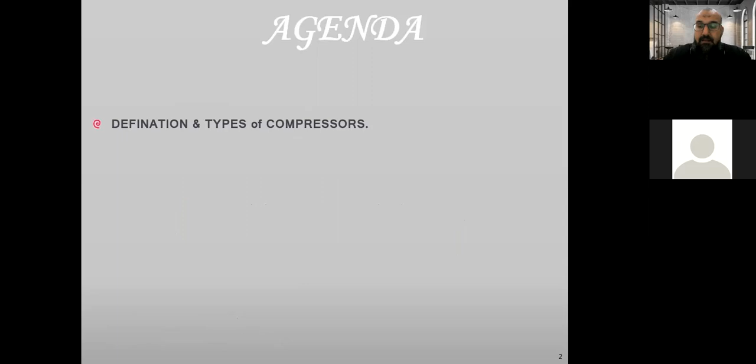After we finish this, we'll second speak about the minimum or general notes about reciprocating compressor, so we will go specifically about one type to describe and explain. We have two major types of compressor. Today, one major type is the reciprocating compressor, which will be our session today.

We'll speak about the arrangement of the reciprocating compressor, how we arrange it, how we locate it, what is the equipment related to the reciprocating compressor, how we put this equipment, what is before, what is after. Then we will study also the piping surrounding the reciprocating compressor.

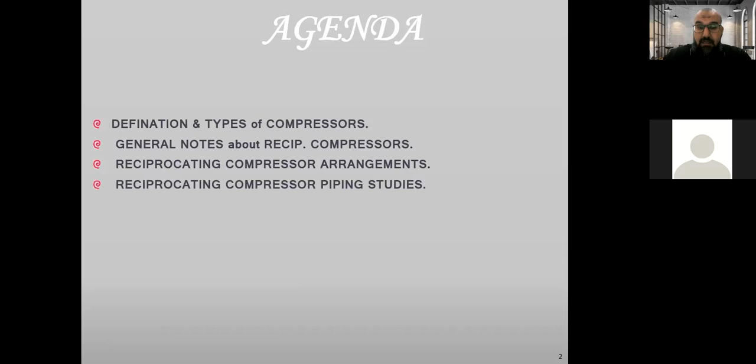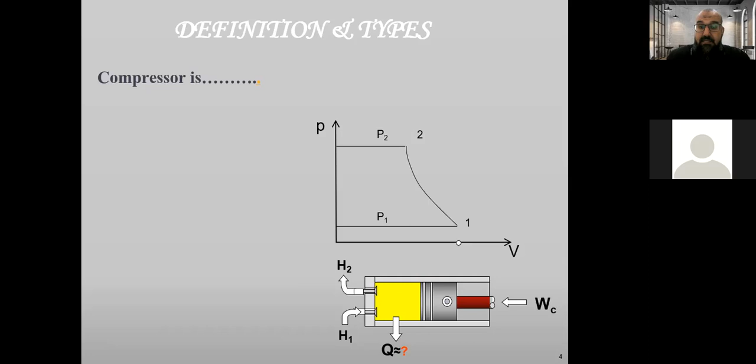So let's start with the compressor itself. What is compressor? What is meant by compressor? It is from the meaning compress - to compress the gas or vapor or air. Any kind of gas or vapor or air - this is a machine that is required to increase the pressure of the gas or vapor or air by compressing.

How are we compressing the gas or air or nitrogen, for instance? By reducing its volume. If someone of you understands mechanical engineering, he will understand what I mean. This is a relationship between the volume and the pressure. P is for pressure, V is for volume. Volume, this is a volume, right? Like the room that I am now staying in is a volume.

This is a room that I am inside, so I am inside the volume. This is the volume - for example, this cup of tea or instant, this is volume, contains a volume of liquid. So this is the volume.

What is the pressure? Pressure is the force on area, or the force relative to area, which I need to transfer flow from point A to point B, or point 1 to point 2. So the pressure is the required force to transfer the flow from point 1 to point 2. So what is the gain here?

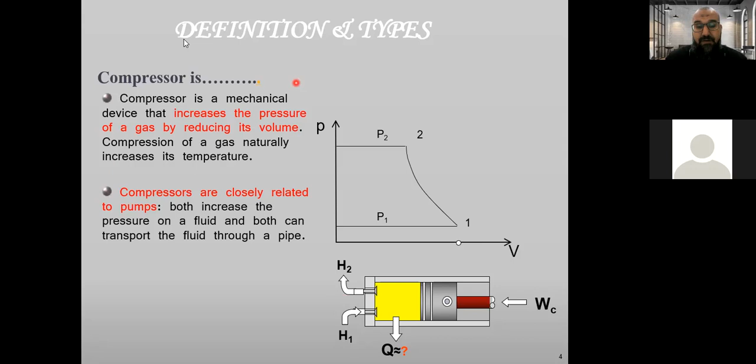So, as I told you, the gases are compressible. What's meant by compressible? Gases are compressible means that it can be compressed. If you have a volume of air, like this room that I am staying in now, and you have a liquefied petroleum bottle, gases compressed in a bottle, and you open it.

You open it, right? These gases will quickly go everywhere, all the way. They will actually occupy all the space, all the volume. The new volume will be occupied by the gases which were compressed. It will occupy a new volume to accommodate all this room. Vice versa, if I need to suck all the gases and liquid from the room, I can compress all of them in a bottle or in a cylinder, for example. This can be compressed.

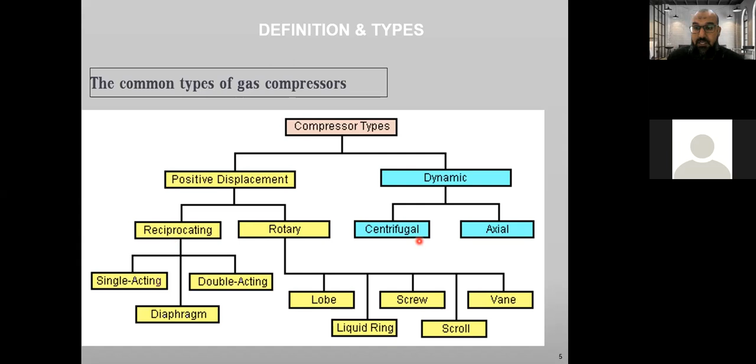Or petroleum industry. You can use reciprocating, which is common in the oil and gas or petroleum industry. You can also use centrifugal type, which is also common use. So this is the dynamic type, and this is the positive displacement type.

Let's focus now on the positive displacement type, which is the reciprocating compressor. The reciprocating compressor is the same machine that is used in the internal combustion engine, close to that one. The internal combustion engine in your vehicle, in your car,

they are using reciprocating type, piston and cylinder. Like if you know this car is 6-cylinder, 4-cylinder, 3-cylinder, 12-cylinder, you know the type of car is based on the number of cylinders. What's this cylinder? This is the cylinder of the reciprocating type, which acts with the piston to do the reciprocating cycle to compress the flow.

So that's why we use this terminology in cars, this car is 6-cylinder or 4-cylinder. It means how much volume we have. That's why its unit is cc. You're saying this car is 1,600 cc. What does cc mean? Cc is cubic centimeter, so that means volume. We are measuring the volume by cube, volume, because it has 3 dimensions, X, Y, and Z. The volume always has 3 dimensions, that's why we say cc, which means centimeter cube.

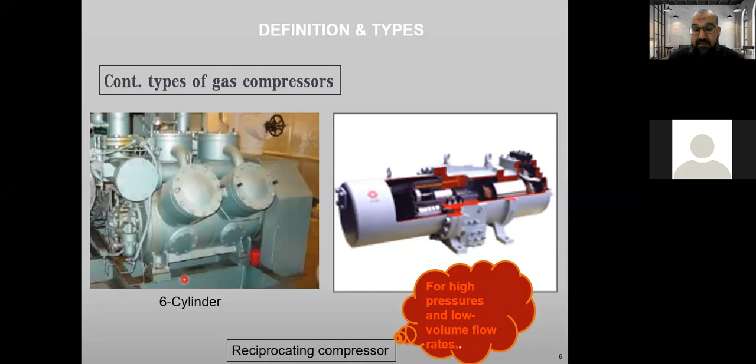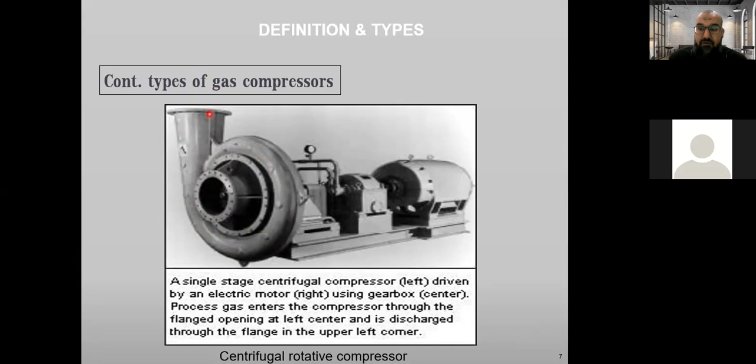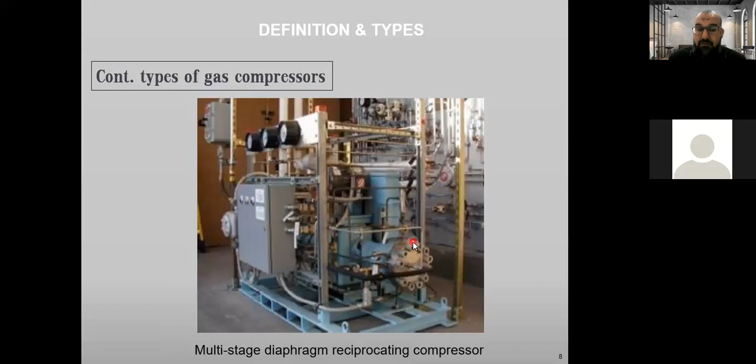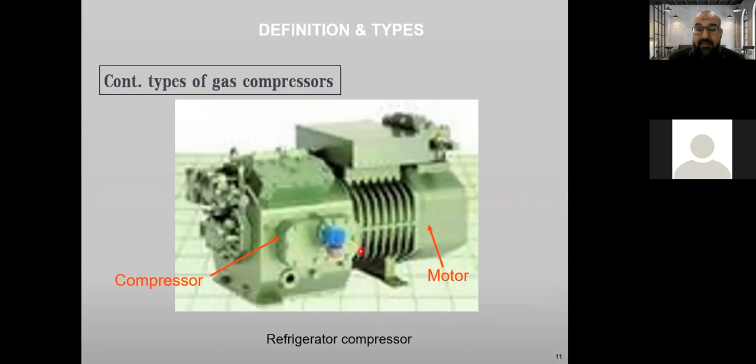Okay. This is one type of air compressor. This is another type of refrigerator compressor. It should definitely be driven either by motor or steam. Here it's driven by motor, electrically, and this is a compressor here.

This is another type of refrigerator compressor. This is the compressor side. This is suction and discharge. You have two nozzles here for suction and discharge, and this is the driver here. The driver is motor.

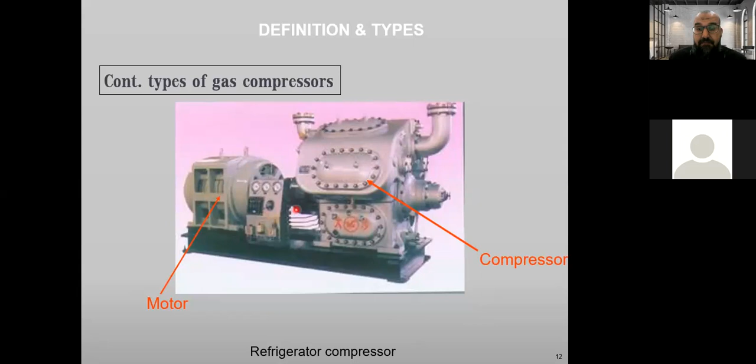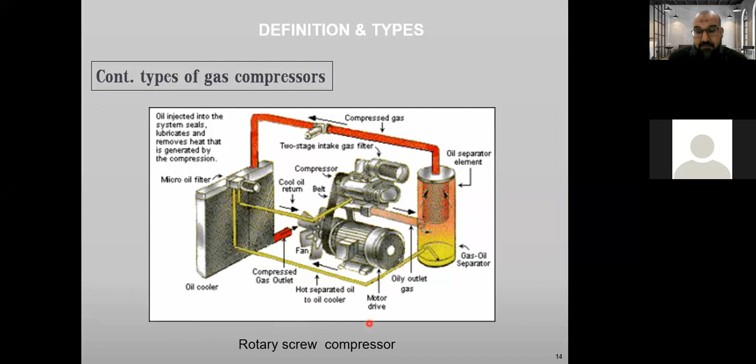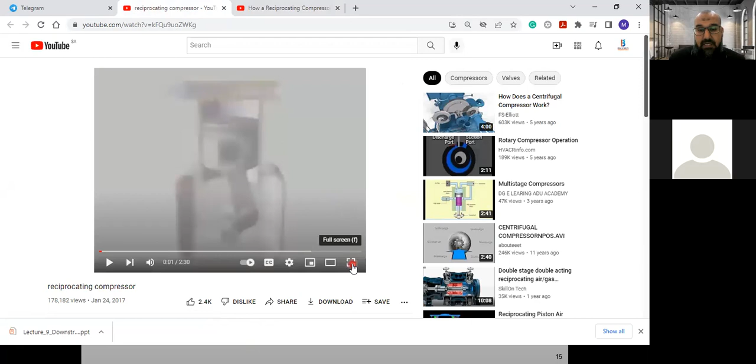So before we go further on the compressor, let's see one video that gives you an example or a meaning of reciprocating compressor and how it actually works in the machine.

A reciprocating compressor compresses refrigerant vapor in a cylinder using a piston. In a way, reciprocating compressors are like automobile engines. The pistons are directly driven through a wrist pin and connecting rod from a crankshaft. Depending on their size, reciprocating compressors may have one or more cylinders.

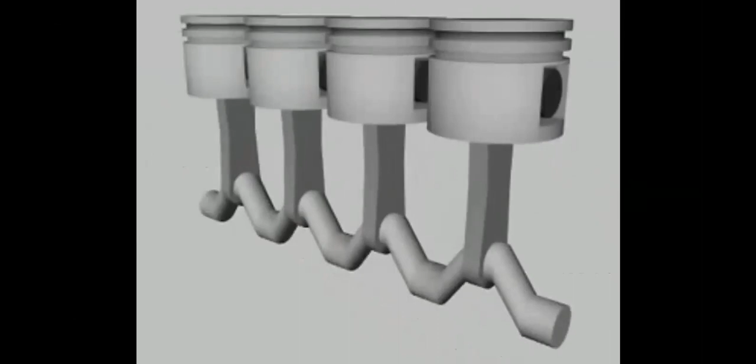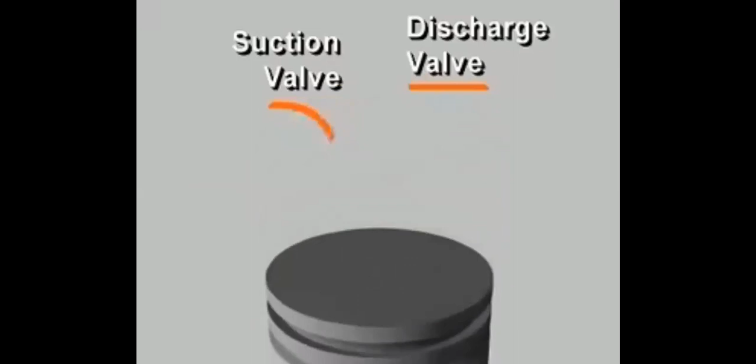Multiple cylinders may be arranged in line, opposed, or in a V. In each cylinder, reciprocating compressors have both a suction valve and a discharge valve. These valves give the compressor its ability to pump refrigerant vapor against a pressure difference. They are usually located in the head of the cylinder, in passages connected to the high or low pressure side of the system. Let's follow the compression process in a single-cylinder reciprocating compressor during one complete revolution of the crankshaft.

Starting with the piston at the top of its stroke, or top dead center, the piston begins to move downward as the crankshaft rotates. Because both valves are closed, the downward moving piston reduces the pressure in the cylinder. As the pressure in the cylinder falls below the low side pressure in the suction line, the pressure difference opens the suction valve, letting refrigerant vapor flow into the cylinder. The piston continues down and pulls in more vapor until the cylinder is filled with low-pressure vapor at the bottom of its stroke.

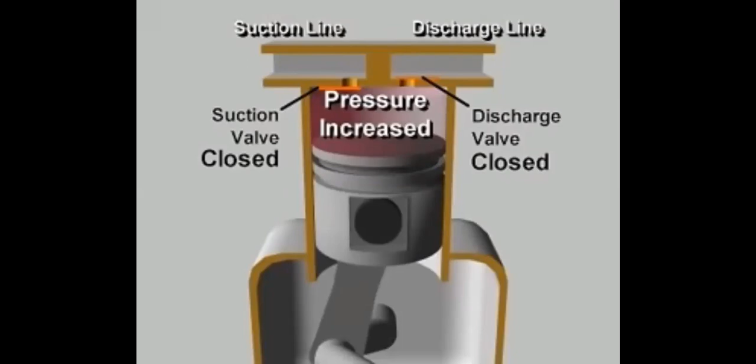Once past bottom dead center, the piston begins its upward stroke. The suction valve closes. As the piston moves up, it reduces the volume of the space in the cylinder, increasing the pressure of the vapor. When the pressure in the cylinder exceeds the high side pressure in the discharge line, the pressure difference pushes the discharge valve open, letting the compressed vapor flow out of the cylinder.

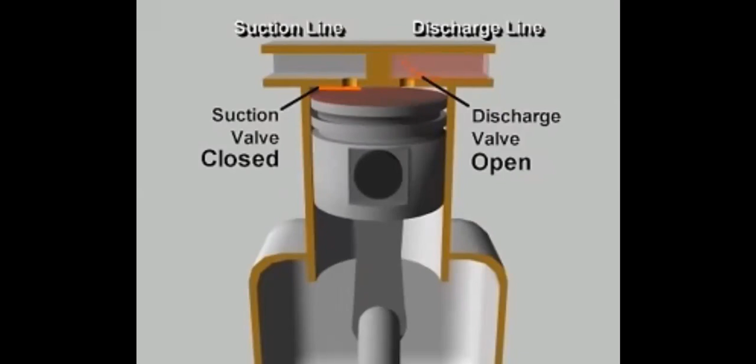This continues until the piston reaches the top of its stroke and most of the compressed vapor has been expelled into the discharge line. When the piston begins its downward stroke, the discharge valve closes. The complete cycle then repeats during each revolution of the crankshaft. This is the mechanical positive displacement vapor compression cycle using a reciprocating compressor.

Okay, so this is how it works, reciprocating compressor. This is exactly the same that we are seeing in what? We are seeing in our car, in the vehicles, cars.

So how, if you need to know about the rotary type or centrifugal compressor type, how it works? Let's speak about centrifugal type.

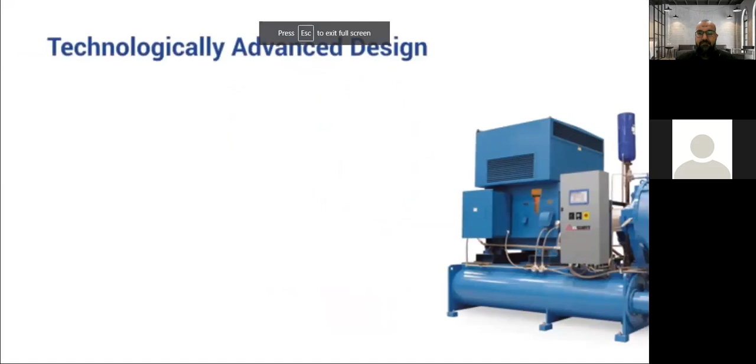For over 50 years, F.S. Elliott's oil-free centrifugal air and gas compressors have led the industry with a technologically advanced design that delivers reliable, trouble-free operation with the lowest cost of ownership, offering a horsepower range of 250 to 5,000 with up to 4 stages of compression. Our compressors are ideally suited to a broad range of industries.

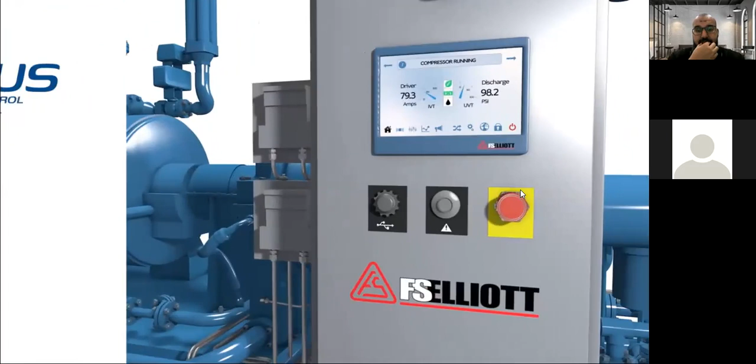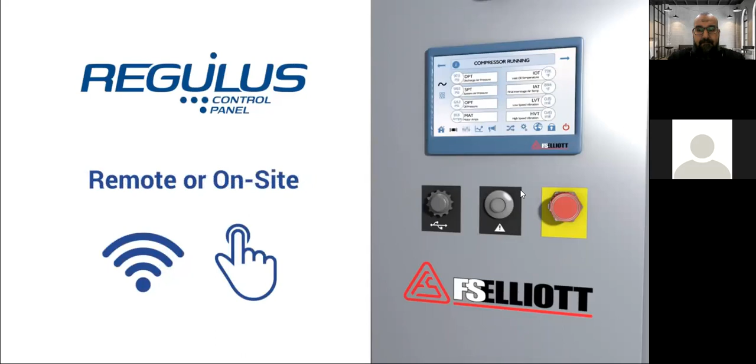Every aspect of your compressor's performance is governed by our multifaceted Regulus control system. This easy-to-use central control system features the most powerful processors in the industry and can be used either remotely or at the site of the unit itself. With the unprecedented control provided by the Regulus system, a manager can operate one or more compressors at a time while simultaneously achieving the greatest energy-saving efficiency possible.

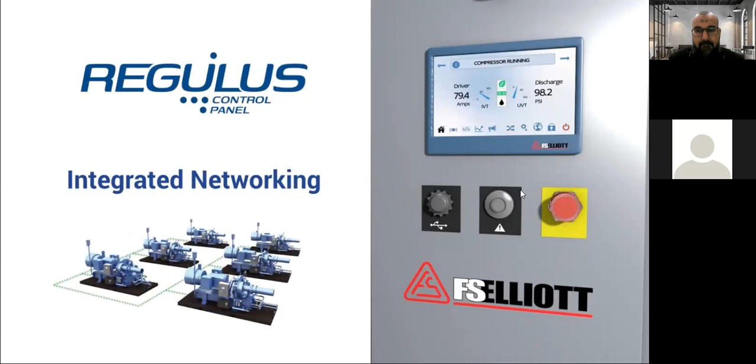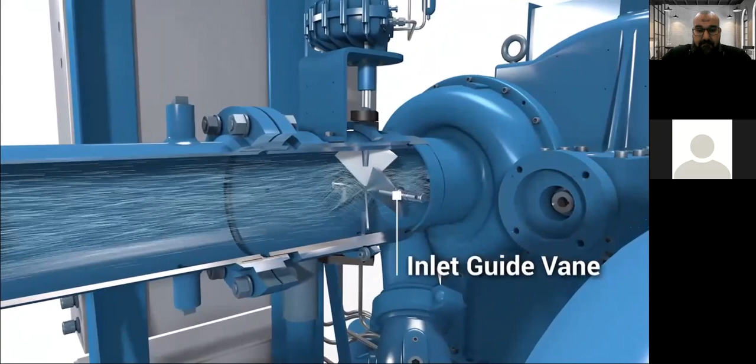Before entering the first compression stage in a multi-stage configuration, ambient air or gas must pass through F.S. Elliott's high-efficiency filtration system. From there, an inlet guide vane automatically adjusts itself to changes in system demand, regulating the incoming low-velocity air or gas stream as it flows toward the first stage impeller with a pre-swirl effect.

As the low-velocity air or gas stream flows into the first stage stainless steel impeller at the inducer, centrifugal force directs its flow to the trailing edge. From there, the accelerated air or gas stream flows from the first stage impeller to a radial diffuser, which converts the air's high velocity into static pressure before the heated air enters the scroll casing.

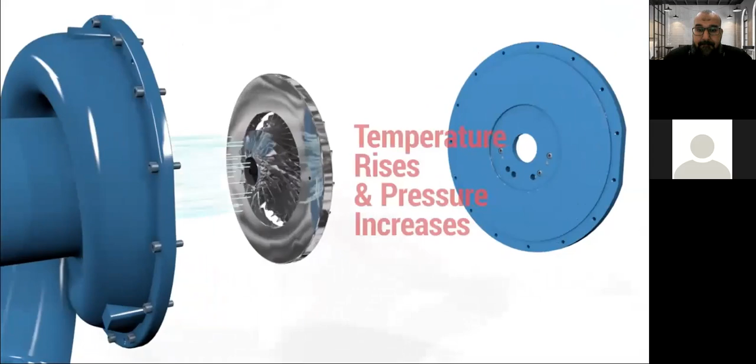To ensure perfect aerodynamics, F.S. Elliott will custom design both the backward-leaning impeller and radial diffuser for your specific application. With each stage of compression, the air or gas temperature rises, pressure increases, and volume decreases.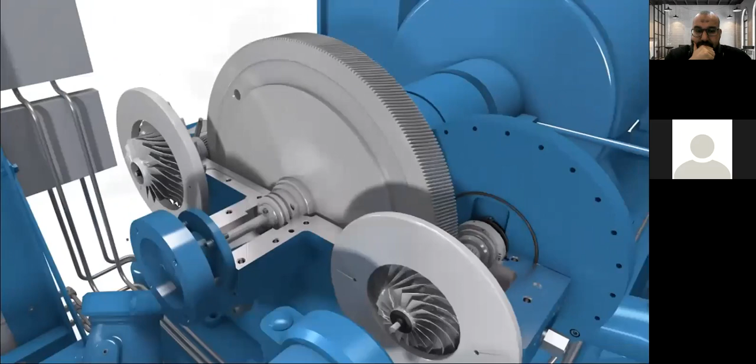In addition to the impellers and radial diffusers, the rotor assembly consists of a pinion supported by 2 self-centering tilting or flexure pad journal bearings. Shaft seals on the impellers prevent gearbox oil from contaminating the compression chamber. Powered by a high-speed motor, the pinions and central bull gear are machined to AGMA Quality Class 13.

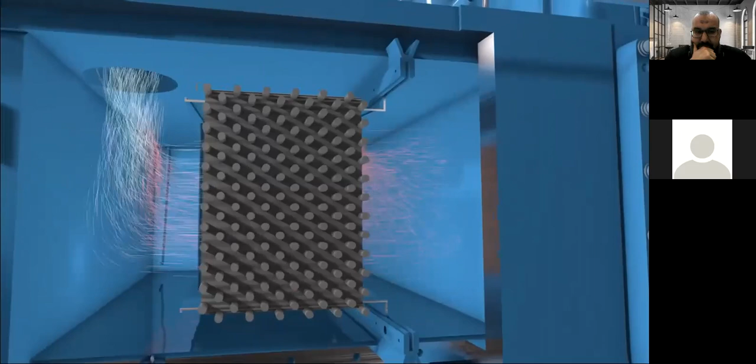After passing into the scroll casing, the heated air or gas flows through the interstage piping into the first stage intercooler, causing the moisture to condensate and separate from the lower velocity cooled air. Because F.S. Elliott intercoolers feature straight-through tubes, cleaning is possible, rather than costly replacement.

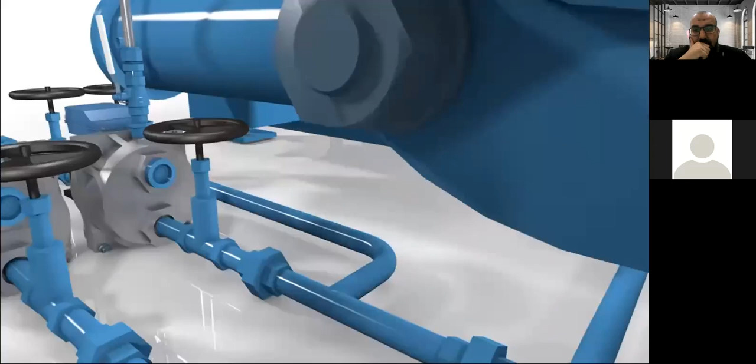As the air travels through the corrosion-resistant plenum, the separated condensate is removed from the compressor through a drain valve located at the bottom of the intercooler enclosure. By regulating the discharge of condensate, the drain valve increases the efficiency of the process by preventing unnecessary compressed air loss.

Once the condensate is removed, the cooled air exits the intercooler and flows into the inlet duct for the next stage of compression, during which the entire process is repeated. The compressed air or gas then moves to the aftercooler, where it's cooled and any remaining moisture is removed.

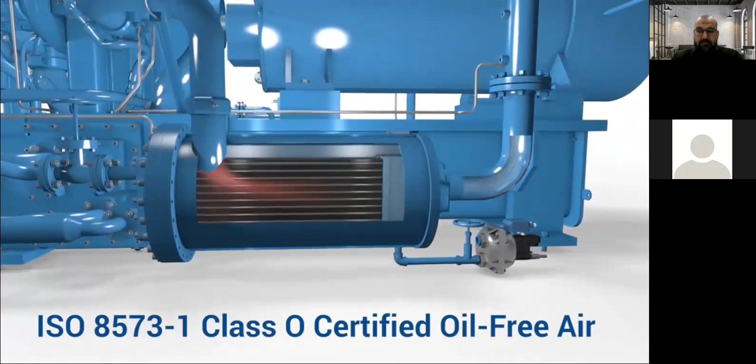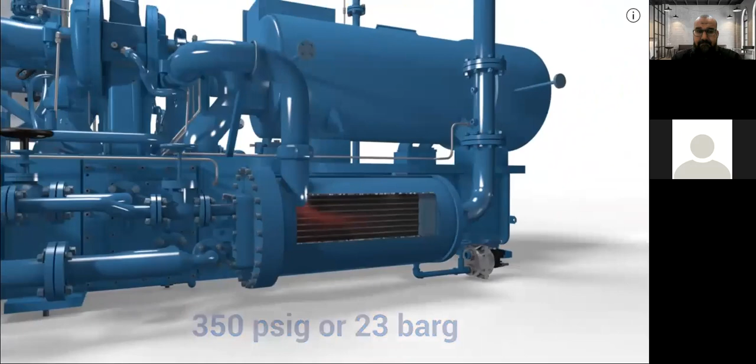This highly energy-efficient process concludes with the delivery of ISO 8573-1 Class 0 certified oil-free air, ready to power a variety of industrial applications. Depending on the number of stages within the configuration, discharge pressure can reach a maximum of 350 psig or 23 bar-g. Whether your application calls for a hard-working industrial compressor package or an engineered custom design, you can count on FS Elliott to deliver efficient performance.

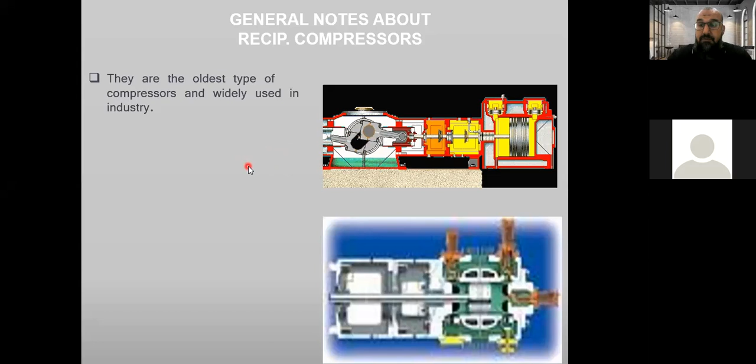And this type, they say here, has very high maintenance cost and lower capacity than the dynamic compressor. So the reciprocating compressor in the oil and gas industry, because it is huge, it requires high maintenance. It requires more repair, more changing in materials, and lower capacity than the dynamic type.

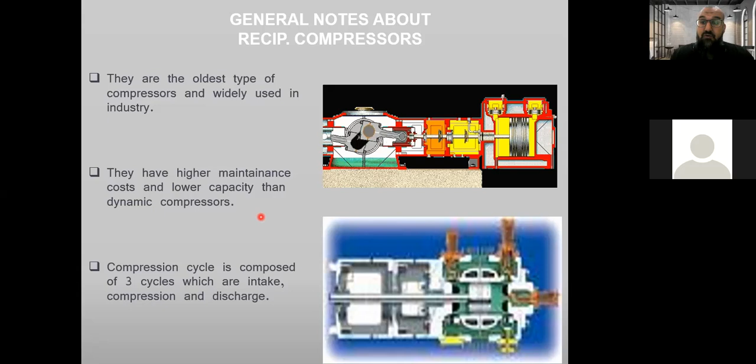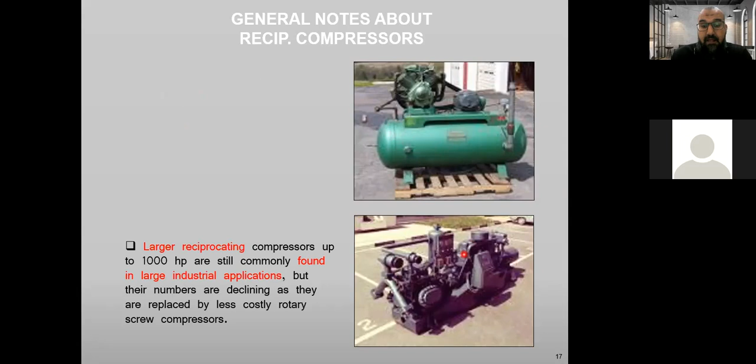And we use some large reciprocating compressors that can reach up to 1,000 horsepower. This is mainly used in industrial practice like the oil and gas industry, and it will be more in size mainly. So the discharge pressure can range from low pressure to very high pressure. It can reach up to 35 megapascal, or more than 5,000 psi.

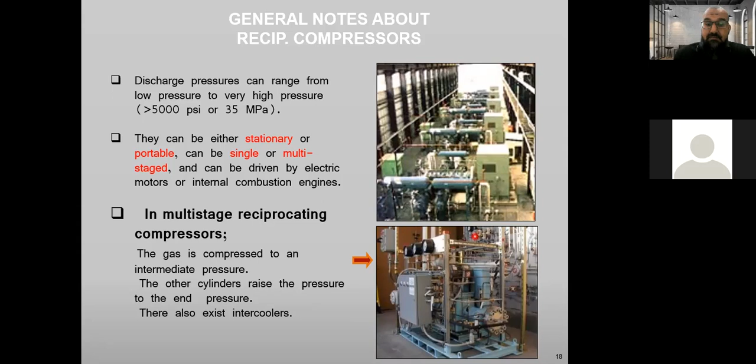So this is how you can see how many stages are here in the compressor to reach this kind of very high pressure. So this is called multi-stage reciprocating compressor. In the multi-stage reciprocating compressor, the gas is compressed to an intermediate pressure first. Then the other cylinder is used to raise the pressure from the intermediate pressure to the end pressure, until it reaches the destination.

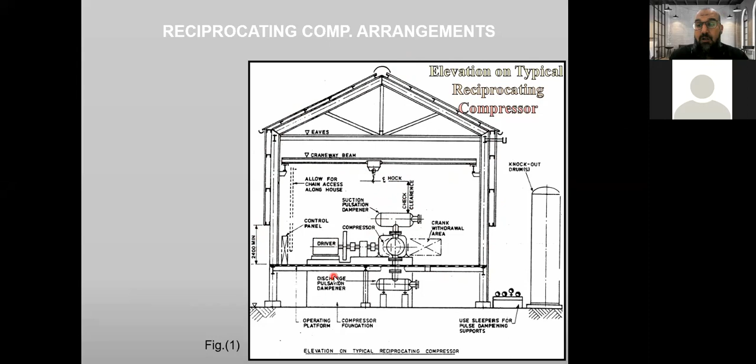We have some arrangement of the compressor. How do we arrange the reciprocating compressor? First of all, the reciprocating compressor requires a structure like this one. Why? Because, as we told, the reciprocating compressor frequently requires maintenance. So you want to have this kind of hookup, required to carry the heavy parts of the compressor, like the driver or the shaft, any kind of heavy part you want to carry, so they will be able to support enough weight. So you use this hook in the craneway beam, and this is actually a monorail, and this cannot be done without a structure. That's why we always use this huge structure as a housing shield for the compressor.

So if you look at this one, you can see first the compressor. This is a compressor.

Second, here you will see the driver. Here is a driver, which can be a motor driver or a steam driver, any kind of driver, but you have to have something that drives the compressor, the same as your car. The car, you start with the battery, you start the engine with your key to start the battery first. So starting the engine without a driver, which is the battery, the electrical source, you cannot start the engine. So the engine first needs power to be driven. So this is called the driver.

Third, you have a suction pulsation dampener. This is a dampener, actually to damp the vibration and noise at the suction or intake nozzle. The compressor, as we told, the reciprocating compressor has a lot of movement, can reach 3,000 revolutions per minute. So the compressor, with the piston and cylinder, has intake, compression and discharge, with revolutions and strokes very frequent, and this actually causes noise and vibration. So you need to dampen this. How do you dampen this? By using a suction pulsation dampener.

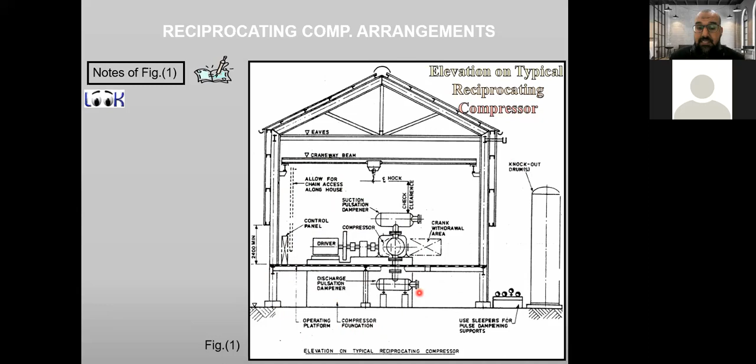The trucks can easily come into this area for maintenance purposes, to carry the material or the part that needs to be repaired or replaced, so it can be easily carried on. Without this free area, we cannot carry any heavy part of the machine since it is really heavy. So we need a free access area so that the trucks can go over here and carry, maybe, the motor or the shaft, and have enough space to move and do the maintenance required.

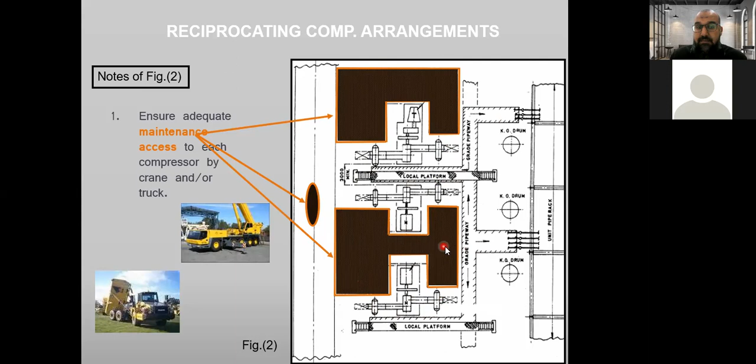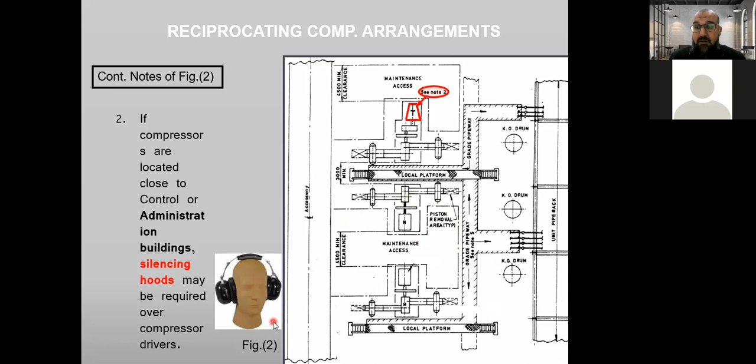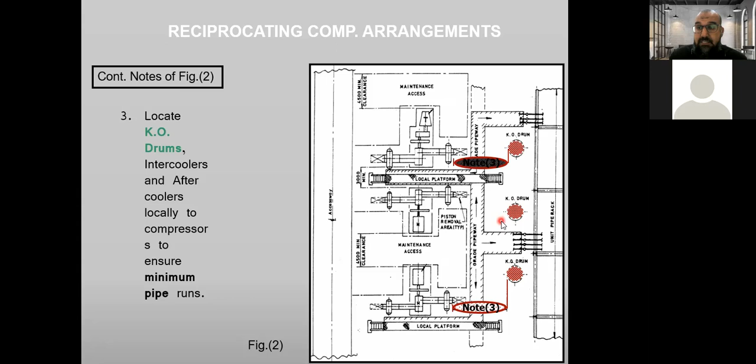The knockout drum is always required to be close to the compressor, to ensure that no liquid enters the compressor, only gases.

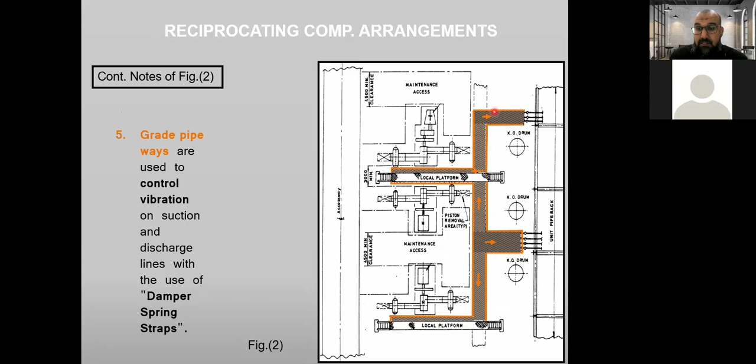Another area here is for the pipeway, mainly for the piping connecting to the compressor. We need to give access way or platform, because there may be some on and off valves that should be accessible from a platform. So we provide a platform to access the on and off valves around the pipeway.

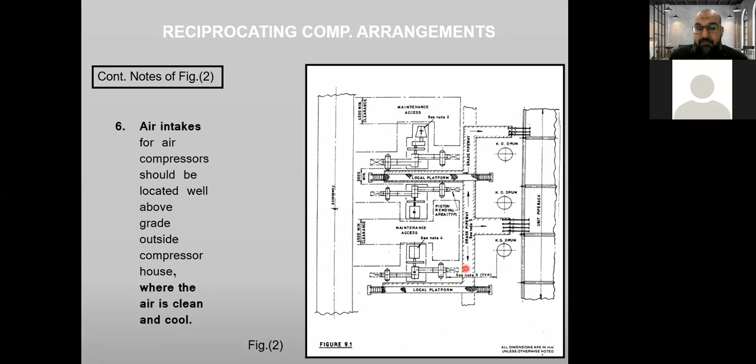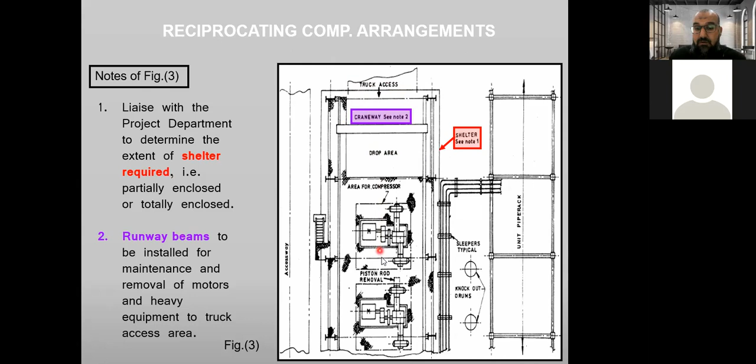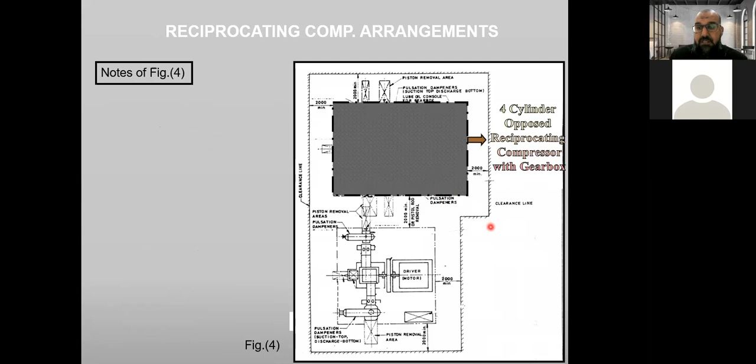This is a four-cylinder reciprocating compressor with gearbox, and this is a two-cylinder type reciprocating compressor. If you increase the number of cylinders, you are increasing the pressure. As we increase the cylinder type, that means you are increasing both the flow and the pressure.

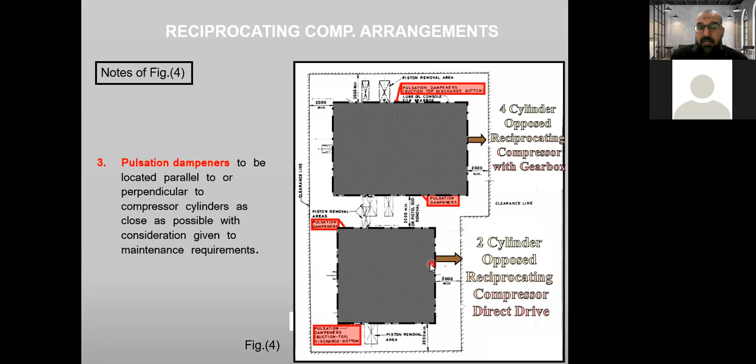We have to ensure adequate area for piston removal. The pulsation damper here should be located parallel to the compressor, as close as possible. There is also a lube oil console for lubrication, which is also required as part of the compressor.

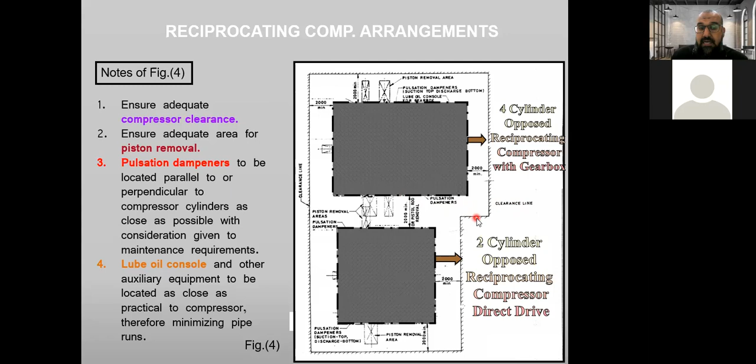So these are all the areas that should be considered within the compressors: we should ensure adequate area for piston removal, and the pulsation damper should be located parallel to the compressor, as close as possible, considering the maintenance requirement.

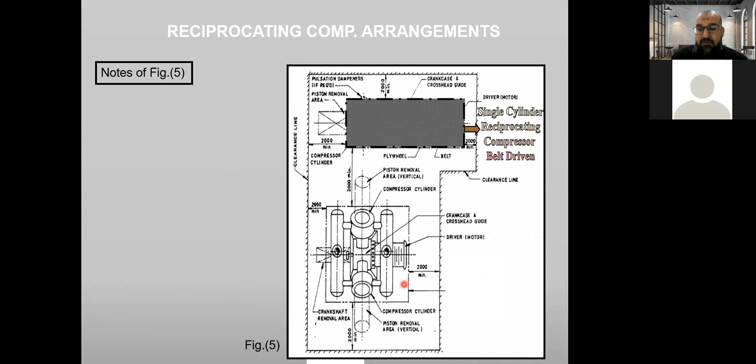This is a single cylinder reciprocating compressor, belt driven, and this is a V-type reciprocating compressor. So this is V-type, and this is single cylinder belt driven.

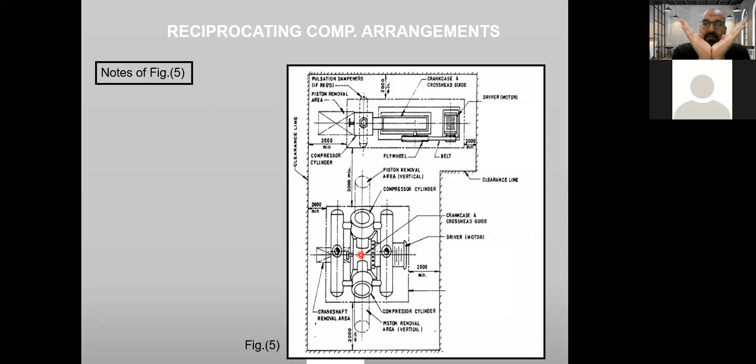This V-type reciprocating compressor has an arrangement like a V-shape. There is one piston and cylinder here, and one piston and cylinder there, arranged like this. It's called V-type because it has a V shape, with one compression cylinder here and one compression cylinder there, both connecting at this point — that's why we call it a V-type compressor.

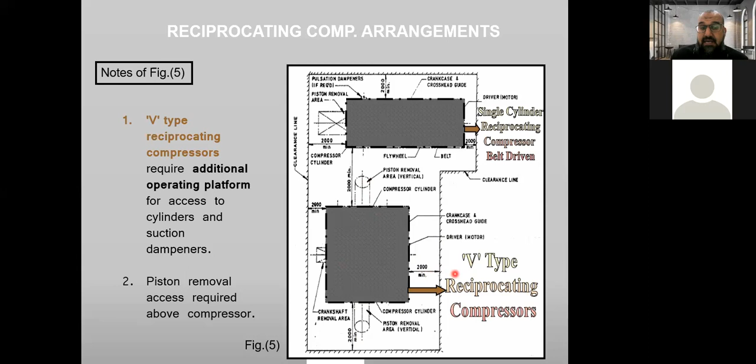This V-type compressor requires many additional platforms and access areas to reach the cylinder suction and the dampener.

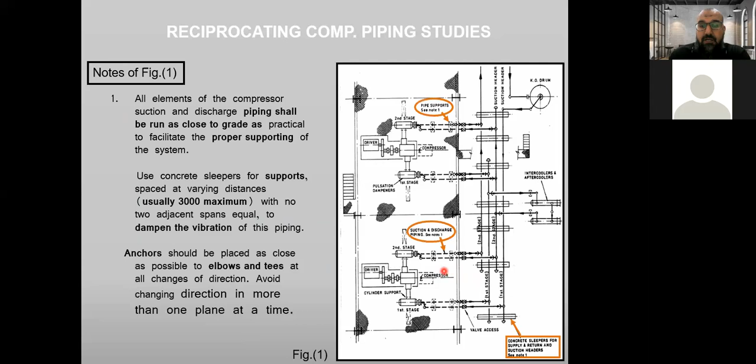This is a general arrangement for piping study. I don't want you to go more detailed in this one. I don't think it is really important now, unless you are specialized in piping mainly. But as a general note for piping, as I told you, this compressor is always a vibrating machine.

It has a dampener, so the piping should have a hold-down support and be supported adequately. So the pipe connecting all this, this is the second stage compressor, this is the first stage compressor, this is the compressor itself, and this is the driver.

The pipe connecting to the compressor goes to the knockout drum, carrying the gas itself. So the gas is here in the pipe. The compressor, once it has done its part, there is a discharge, so wherever the discharge goes, it goes through the pipe. That's why we need a pipe, for discharge and also for suction, for intake.

This is why we are using pipe. This is actually the drum that's part of the compressor, used to go inside the compressor. This is the inlet here. If you look at the flow arrow, it gives you an indication of the flow direction. It comes here from the top of the drum, the knockout drum. It's only intaking gases, so the gas is coming here. This is the flow direction.

Flow direction is going to the compressor, first stage, then the second stage, then this is the discharge. This is the discharge here, this is the discharge piping, and it will go out away.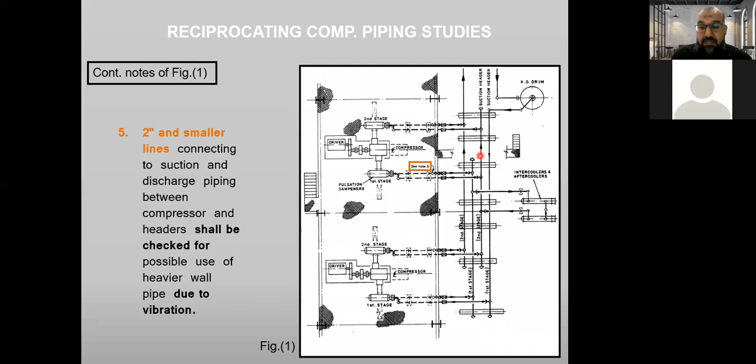This is also another example of the compressor foundation with pipe support required to support the pipe, as I told you, to avoid any vibration.

A startup strainer is also required, and should be installed in the suction area. It has the same function as the strainer we used in the pump in the previous lecture, if you remember. We use a strainer in the pump, and we also use a strainer in the compressor, in the suction line, to remove any particles.

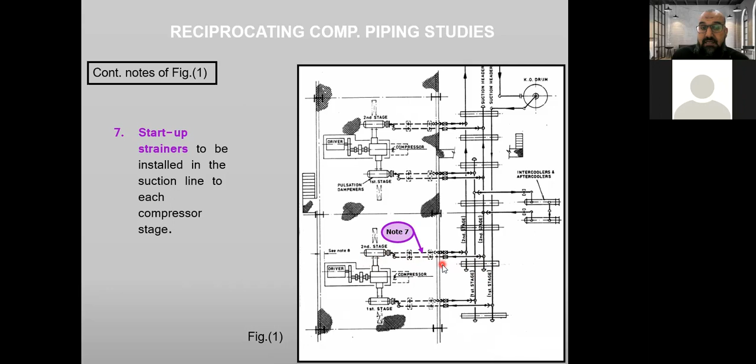Actually there is no impeller, this is reciprocating, so these particles would go to the piston and cylinder, so we should have a strainer, with access for maintenance as required.

So this is also another consideration for piping arrangement, and how we operate it from the platform, and how we work with piping, with pipe support, and all of this kind of arrangement.

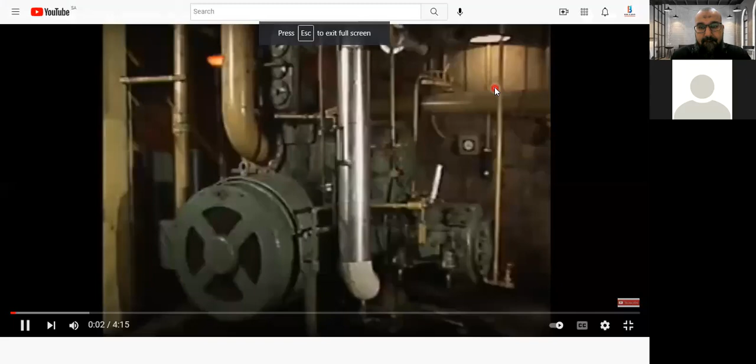Compressors are used in many different types of compressed gas systems, and a particular facility may have several compressed gas systems. This is the V-type, if you remember, I told you it's like this. This is one V-type, this is the piston and cylinder here, there is inside a piston and cylinder, and there is also another piston and cylinder declination. It is not vertical, it is declined. So they connect together like this, they're called V-type. And if you look here, this is the knockout drum.

That ensures that the only flow going to the compressor is gases, so we ensure that the flow going in is only gases. We can use this simplified illustration to identify the basic components of a typical compressed air system.

You may also hear a compressed air system referred to as a pneumatic system. The system includes a reciprocating compressor with 2 cylinders and 2 pistons, an intercooler, an aftercooler, a demister, a safety valve, and a receiver. The compressor is a multi-stage reciprocating compressor, containing 2 or more cylinders connected so that the discharge of one cylinder is directed into the inlet of another cylinder.

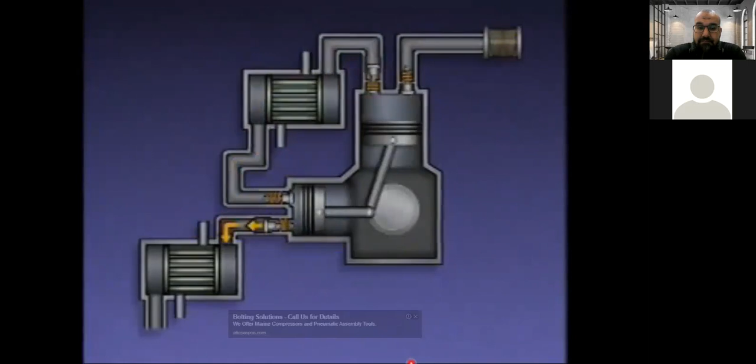From the second stage, the compressed air is sent to the aftercooler, which is another shell and tube heat exchanger. As the compressed air passes through the tubes in the aftercooler, it is cooled by water flowing around the tubes. During the cooling process, any water vapor that is in the air condenses, so there may be moisture in the compressed air.

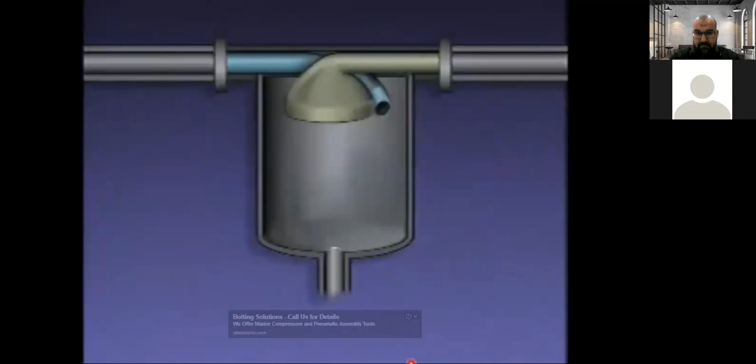So, the compressed air is sent from the aftercooler to the demister, which removes moisture from the compressed air to prevent it from damaging equipment that uses compressed air. Inside the demister, the compressed air is swirled around inside a cylinder. The swirling action causes the heavier moisture to separate from the lighter air and collect in the bottom of the cylinder. The moisture is then drained from the system, and the dry compressed air is routed to other components in the system.

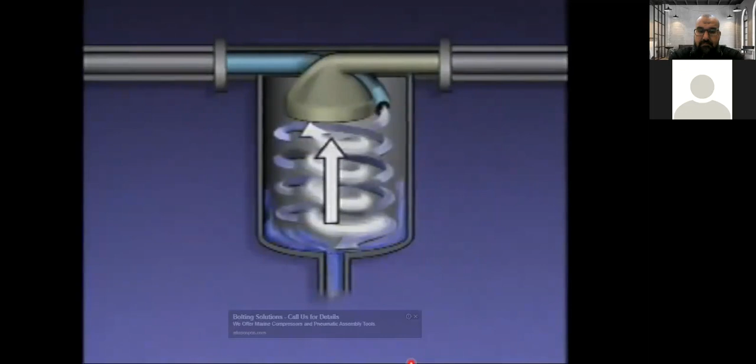The function of the safety valve is to protect the system from excessive pressure. If too much pressure builds up...

So this is actually why we are using this demister, as he told, is actually to produce a dry gas. We should not have moisture. Moisture means some droplets, some condensate. Moisture means it's not 100% dry. It should be dry. So the ultimate goal we need to reach is a dry gas - no condensate, no liquid, no moisture - so it's ready to be used.

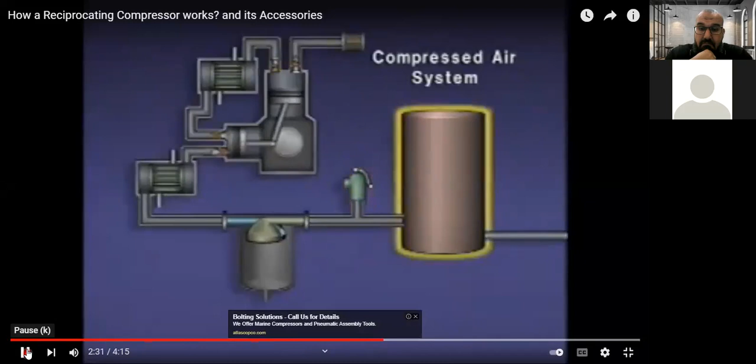The safety valve will open to relieve the pressure. The receiver is a tank that's used to store dry compressed air. From the receiver, the compressed air is sent through piping to other systems at 120 psi.

All of the piping that contains the 120 psi air is referred to as the plant air header or the service air header. The service air header runs throughout the plant to supply air to the equipment that needs it. But pneumatic instruments require compressed air that is extremely clean and dry, and at a lower pressure than this air.

So remember now what he said, the instrument device requires air which is extremely clean and dry. Extremely clean and dry - so how do you ensure it is dry? You have to use this demister to remove any kind of condensate, any kind of liquid. It is purely dry, okay.

Air supplied by the plant air header. Providing this quality of air requires devices such as an oil separator, a desiccant dryer, filters, and a pressure-reducing valve.

A small amount of oil is frequently present in the air discharged from a compressor. Since this oil can damage control system components, it must be removed. This function is carried out by an oil separator. The oil that is removed collects in the bottom of the separator and is often drained to a waste system.

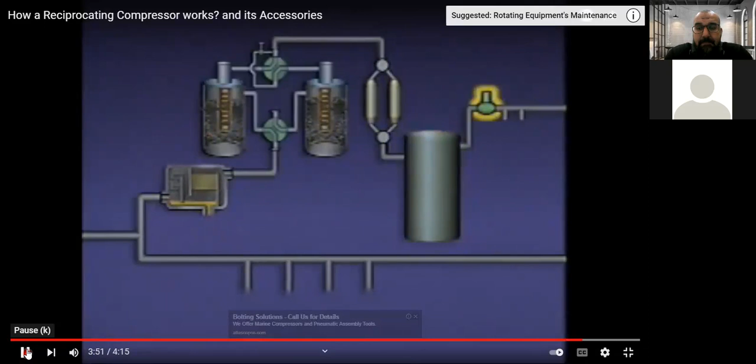A desiccant dryer removes moisture that may be present in the air. Filters remove any solid impurities that may be present. Dry filtered air that is suitable for use in a control system is typically stored in a receiver until it is needed. Then it is sent to a pressure-reducing valve, whose function is to reduce the 120 psi air to 50 psi for use in pneumatic instruments and devices throughout the plant.

The compressed air coming out of the pressure-reducing valve is distributed by an instrument air header. The instrument air header supplies 50 psi air for use in pneumatic control systems. This pressure can be further reduced by the devices that get compressed air from this header.

Compressors are used in many...